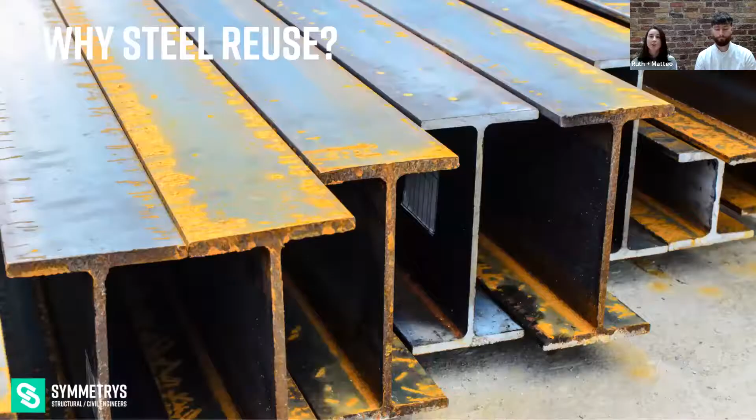So what is our particular story of steel reuse, and why are we looking at steel reuse? So it's something that's been talked about broadly for many, many years, even decades, but it's all largely been in theory, and the practical application of it has actually been very limited. Generally, it's been only around demountable structures or rebuilding the same structure, but just in a new location. So we're really looking at actually reusing it for a new building.

And recently we were challenged by this on a project with a client to reuse steel. So this led us to really investigate the implications and the viability of using reclaimed steel, interrogating the practicalities of steel reuse, and producing a genuine and an actionable roadmap. So that's what we're going to talk about, but what's actually happening right now?

Yeah, so just as a quick run through, we're going to take you through how steel is created in the first place, for those of you who don't know. It is a material that's mined from the ground in the form of iron ore. That iron ore is processed along with limestone and coal and taken to a manufacturing facility. All those materials are added into a furnace, heated to a high temperature to make the liquid iron. Once that molten iron has been created, it's piped off and sent to another furnace where it is heated to really high temperatures, and that's a basic oxygen furnace. So that uses high-powered oxygen jets to heat it really, really hot, and that's where you get your steel from.

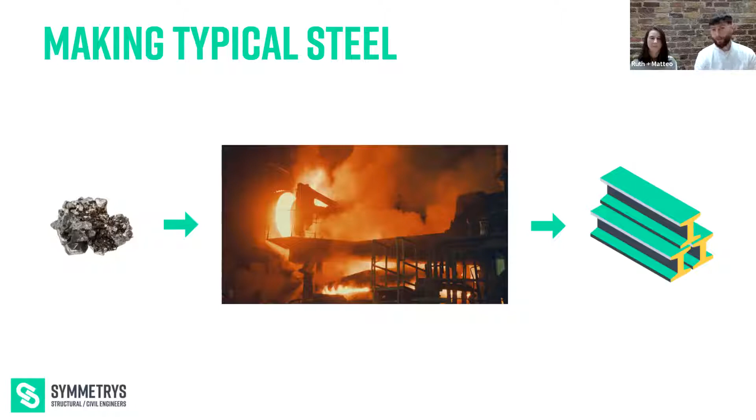Obviously, this is a highly energy-intensive process. It locks a lot of embodied CO2 into steel sections. That's from the mining of the raw materials all the way through to the actual production. And obviously mining is destructive too, or can be very destructive to local habitats. So the more that we can limit this, the better. And that's where reusing steel comes in, and recycling steel. So we recycle quite a lot of our steel. 98% of it is actually recycled, which is fantastic. And steel's amazing for that because it can be continuously recycled without any losses to its structural properties.

So the process of recycling steel is relatively straightforward. The steel structure is demolished. It's cut into small lengths and transported to a recycling facility. And there it's added to something called an electric arc furnace, which uses electricity from the national grid to melt that steel down. Now, an electric arc furnace can be charged with 100% scrap metal, which is obviously really efficient, or it can be charged with a combination of mined material and the scrap metal. As I mentioned, the electric arc furnace is run from the national grid. So the embodied carbon associated with steel that comes from an electric arc furnace is really dictated by how efficient and green your grid is.

Obviously, 98% of steel is recycled, but unfortunately, that's not enough. Our demand for steel is so high that 63% of virgin steel is still used in the UK today, despite all of this steel that we're recycling. And it's really an indication of us needing to design more efficiently so that we just use less steel, we're reducing.

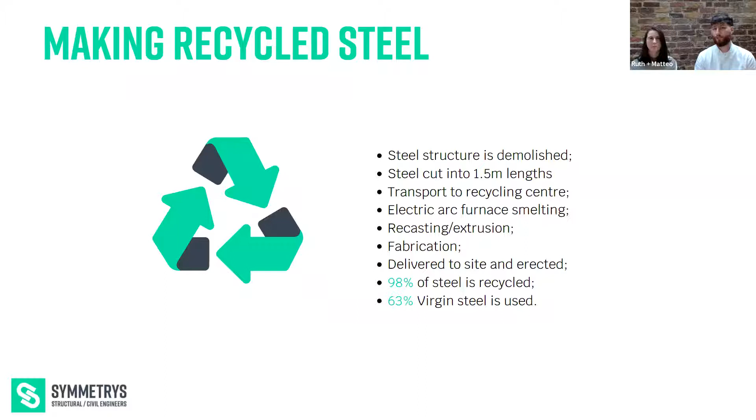But why reuse steel? Well, the sad fact is that 1% of construction materials are actually reclaimed. It's an incredibly low number, with a lot of construction materials just going to landfill. Obviously, in the case of steel, it's great because you can recycle it. But as I mentioned, electric arc furnaces actually have embodied carbon associated with them. Even though you're recycling that steel, you're still having to heat it up, smelt it back down, and recast it.

If an electric arc furnace is in somewhere like Poland, which uses a lot of coal, their coal-fired power stations are going to be powering that electric arc furnace, and it's going to have a higher embodied carbon than, say, somewhere like Denmark that has quite a green grid. So really, we want to be looking at reusing steel sections that have already been created that have a reduced embodied carbon, which we'll come on to later.

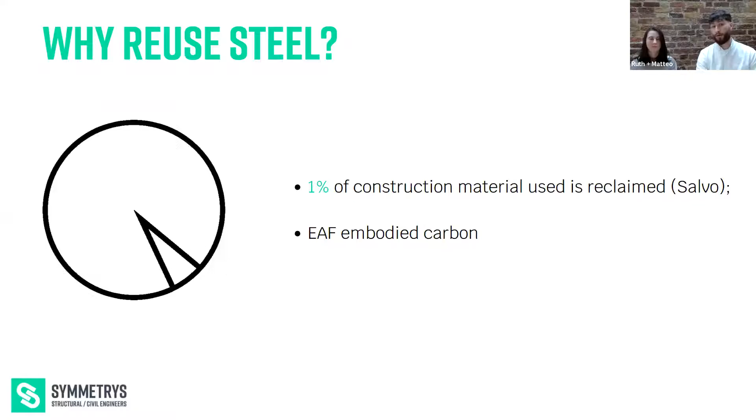So how are we going to reuse steel today? And that's why we're doing this. So obviously the trio of the 3 R's is reduce, reuse, recycle. So we need to start reusing. And we also need to start being more efficient in our design. And this also really chimes in with the ICE President's Address, which is all about material efficiency and design efficiency. So how can we increase that and also steel reuse?

So what is our actionable roadmap? So first off, we envisage this process is currently likely to be driven by clients and developers, and they will be a key stakeholder in this. So the first stage of the process really is, as a team, to identify a suitable steel building. Ideally, we would refurbish as much as possible, but sometimes demolition is necessary. So of buildings that have been earmarked to be demolished, which buildings are suitable to reclaim steel from?

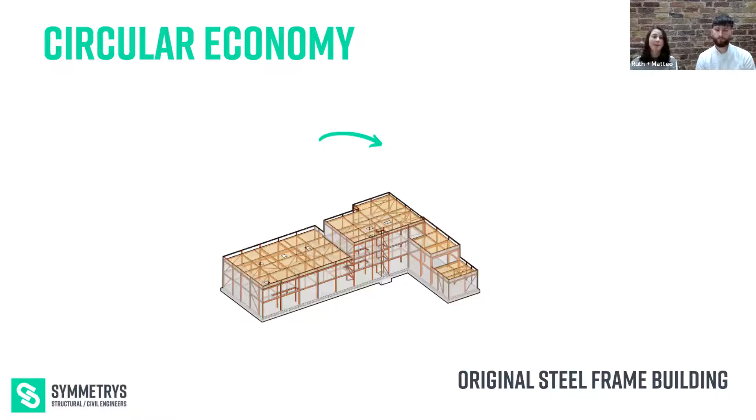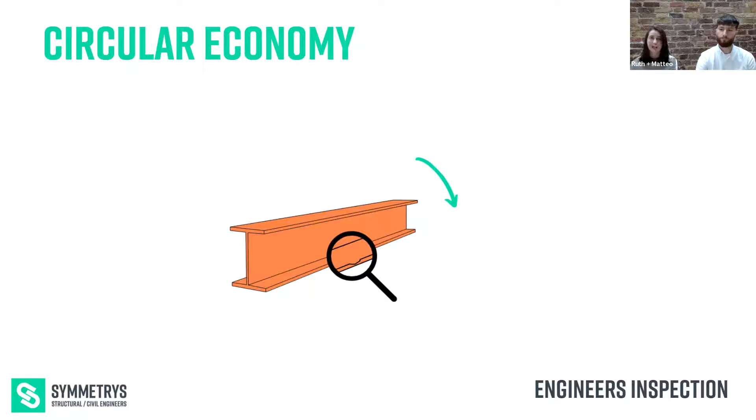So once we've identified those buildings, we can go and inspect the steel, assess the quality, the suitability for reclaim and reuse, and any potential issues around deconstruction. We can approximate the amount of steel that we think we are going to be able to reclaim from the building and start looking at any post-deconstruction processes that may be required, perhaps to do with finishes, intumescent, and start really de-risking the purchase of this steel.

So then once we've done those inspections, we can start planning for the deconstruction. This will require engagement between the demolition contractor and the design team to plan that deconstruction process. How do we take down the steel to maximize the amount usable? How do we manage any of these issues we've identified in the inspection stages? For instance, it's very common at the moment to flame cut beams. As we'll talk about a little bit later, you lose steel length there, rather than blowing the bolts.

So these are all the kind of things that we can discuss in this planning stage to try and make sure that we maximize the amount of steel that we can reclaim and reuse. For things like columns, for instance, at the moment it's standard practice to bring them down level by level, but can we look at ways to drop them between their splices so you get much longer lengths for reuse? And we can really start at this stage of the process to look ahead to the further design program.

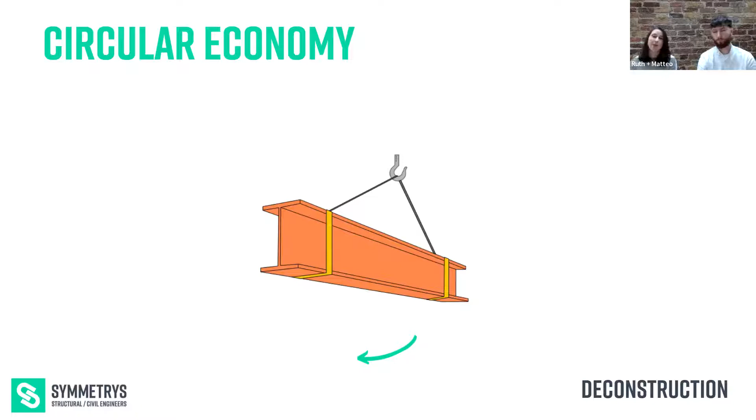So once you've planned that deconstruction, it can be carried out. Ideally, at this stage, we would start grouping the steel, as will become apparent later, based on the section size, the location in the building, details such as finishes, the use of the steel, and any other indications we might have based on potential fabrication information. After deconstruction, the stockholder will then collect.

So then we can go and test the steel. And this is where the grouping is really, really important, because we can test the steel based on those groups, which at a maximum, the recommendation is about 20 tons. And testing will be a mixture of destructive and non-destructive testing. At a minimum, you need to assess what the steel grade is, and depending on the requirements for reuse, you might require further tests for things like subgrades and toughness. Alternatively, we can make safe assumptions based on steel grades, existing use, and depending on what that planned reuse is.

There are lots of test centres already available in the country who actually provide this service. Typically, it's done more for things like offshore and very large industrial rather than construction, but steel is steel. So actually, this is one of the more straightforward parts of the process, and we have lots of industry currently capable of doing this.

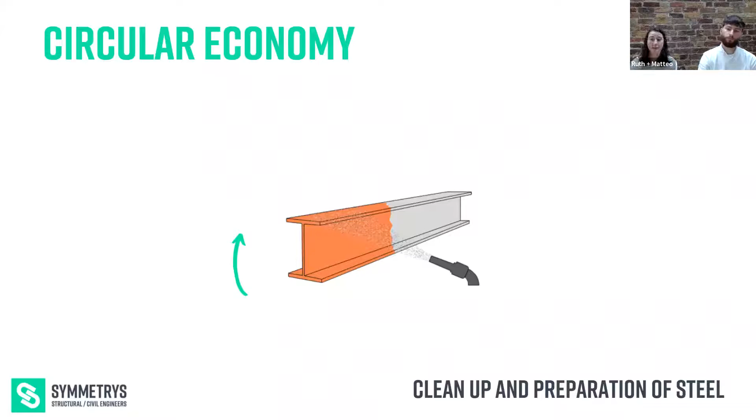Now we come on to preparing the steel for reuse. And this is one of the aspects that can be potentially more challenging and involves more engagement with some of the stakeholders and the fabricator. So here we'd be looking at potentially removing any undesired finishes, any paints, any intumescent, maybe there are shear studs, additional stiffeners, etc., that we don't need.

And one of the problems here with fabricators is things like potentially contaminating their machinery from shot blasting processes. And this is one of those issues that we can pick up early on at the inspection stage, and we can plan for prior, so we can know what we're doing and can go ahead and take it forward and be assured that we are going to be able to actually reuse and reclaim the steel.

So then once we've prepared the steel, we can fabricate it for the new use. So we can add finishes if that's necessary, add new connections if we require new penetrations. And once it's been fabricated, we can deliver it to the site.

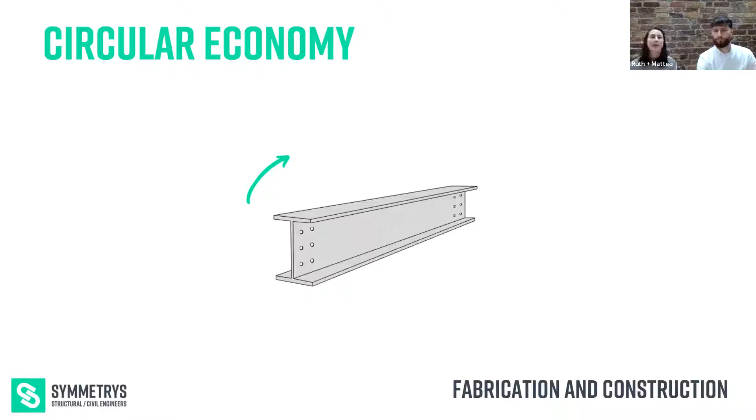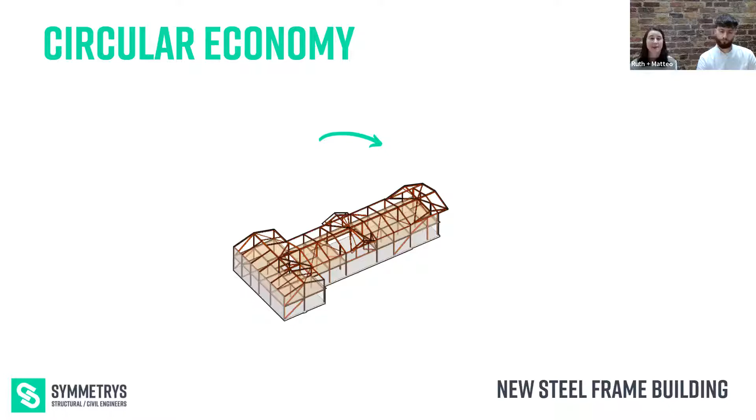We then come to construction, just as we know now, with the installation of our reclaimed steel. But rather than, as has been happening generally now, where it's take down a building, move it, build exactly the same building, actually what we've got now is a brand new building with a new and distinct design from the original building or buildings that we reclaimed the original steel from.

So to summarise, at the moment, we see there being 7 key steps to the circular economy and to this process. So we start with the original buildings, we go through inspection, planning, deconstruction, testing, preparation, fabrication, and new construction. As you can see, this process is currently relatively front-loaded, with a lot of the activities occurring relatively early in the design program and relative to procurement program and tender.

So clearly getting early stakeholder engagement is going to be really, really key in being able to successfully reclaim and reuse steel. So, as we've outlined an actionable roadmap, why is this not happening already? Yeah, so during our research, we've come across a few challenges, and I think it's key to note now that we don't perceive them to be insurmountable. We really think, if the industry is set up to tackle this, we can move past them. So let's go through a couple of those now.

Initially, you're going to need a client who's willing to do this. They have to have an appetite for it, and they have to be willing to accept things like finish. You're not necessarily going to get the same finish on a reclaimed piece of steel as you are from one off the shelf. Things like shear studs, as Ruth mentioned, can be removed from steels, but not necessarily ground flat. So painting over them, it might look a bit different, and that's something that the client will need to be able to accept.

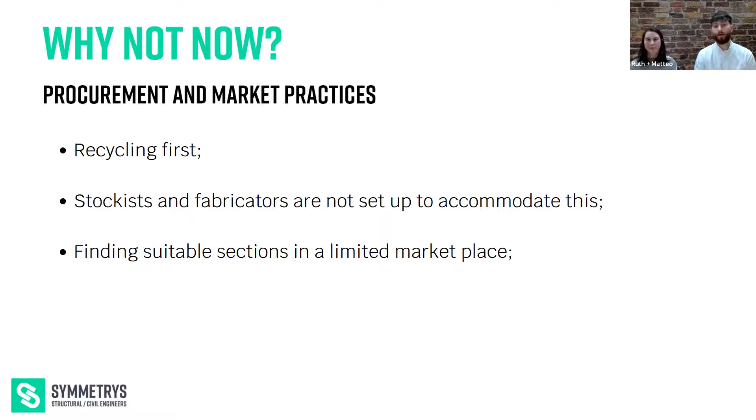We can't just use bigger sections for the sake of it, saying that maybe this office is one day going to be a dance floor. We need to have that flexibility, but using new steel at the moment, there's a high embodied carbon associated with that. If you're using bigger sections that are reclaimed, because those are the only sections you can get, that embodied carbon is going to be cut down quite a lot, which we'll talk about more specifically later. But there are benefits and downsides to this.

So going on to the quality of material, not all steel can be reclaimed and reused, but a huge amount of it can. And as we discussed, an awful lot of the assessment as to whether that's the case can be done very, very early on in the process. So issues that can be a problem are things such as paint and finishes, as we've touched on. Connections can be a problem. Corrosion of the material can obviously be a problem. A significant one to note is also age. We can only reclaim steel post-1970, and this is because at this point, the UK started working towards the Eurocode programme, and steel quality was standardised at this point, which is obviously pretty important to quality assurance.

And then another big one, kind of headline at the top, I've left till last, is plastic deformation. Ductility of steel is really, really crucial in ensuring the safety of the structures that we design. So it's really key that we do not reclaim and reuse sections that have experienced plastic deformation. This might be due to how the structure has been designed, perhaps a particular format of connections, style of the structure, but that will mean that some steel is not suitable for reclaim and reuse.

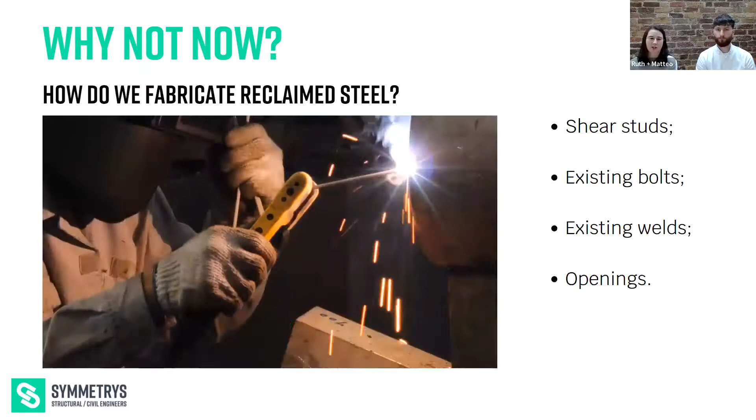So once we've identified the suitable steel and we know that we can reclaim it, we can reuse it, how do we prepare it and what is that fabrication process? What can we do? So as we've discussed, it needs to go through an initial preparation process, which is one of the more challenging aspects, but something that we can absolutely work through. But then once we've prepared the steel, you can essentially do during fabrication all the sorts of things and processes that you're used to doing with new or with recycled steel. So we can add shear studs, we can weld on new parts, we can weld on stiffeners, we can create new openings. We can use the full variety of different connection types.

So how do we specify using reclaimed steel and reusing steel on a project? And who's going to take responsibility for this? As we say, from a financial point of view, we assume at the moment that the steel is likely to be bought by the developer or by the client, and there is a certain risk to this for them. So how, as a design team, can we mitigate this risk and can we reduce it?

So during those initial planning and inspection stages, and by engaging with the full design team and with the full procurement and the fuller industry early on, we can iron out a lot of those issues early, prior to deconstruction, prior to purchase. So we really know that what we will be purchasing and what we are going to reclaim and reuse is good quality material that we can reuse for the purposes intended.

Once we've ensured that, how do we go about actually reusing it? Are contractors obliged to use it? What can we do? So this is something, again, where I think early engagement is really, really important with the contractor who's actually going to go on and build the new structure and use the reclaimed steel. So if you can engage them early in, for instance, those testing processes, get them involved in the quality assurance, make sure that they're comfortable reusing that steel and that they have an awareness, so that we can take it forward.

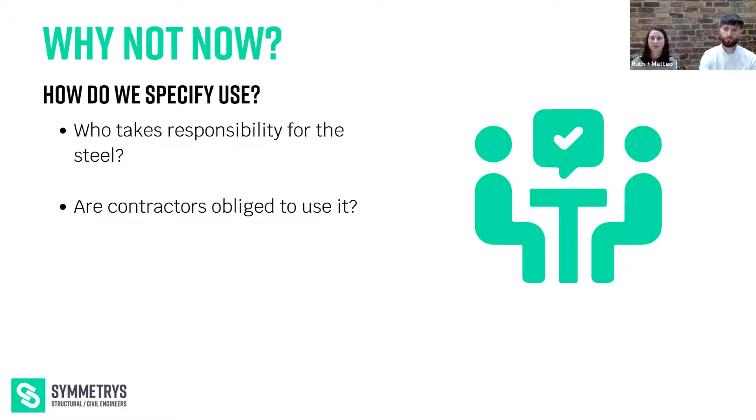So as we've discussed, there are issues, but they're all things that we can deal with right here and right now, and it's absolutely achievable even in the current market. But as steel reclaim and steel reuse becomes more established, how do we think this economy is going to develop further? Yeah, so following our research, Ruth and I have been having a think about the perfect world where this circular economy is really refined into a way of working which we think is the most efficient. So we'll take you through that now.

So what we think will happen in the future, or what we'd like to see happen at least, is that you start with your steel building, as you did before, and then instead of an engineer traveling to site and inspecting that steel, the stockist who would be looking to buy the steel speculatively would be traveling to site, inspecting that steel for all the things that we talked about before. That's corrosion, openings, connections, any deformation that's been locked in.

And then they'd be having the conversation with the demolition contractor, who again would have already been engaged to be made aware that there's an intention for this building to be deconstructed as opposed to demolished. So that demolition contractor would then be deconstructing that building in a way that's not going to affect the integrity of the steel. The stockholder would then buy that steel, and it would be transported by the stockholder to the stockyard where it's being stored. That stockholder would then send that steel off for testing. Once that's been done and the certificates have been issued and the insurers are happy, that steel's ready to be bought.

Then from our point of view as designers, we'd be designing a building, having had that conversation with the stockist of, what sections do you have in stock? We've got this building, what can we use? And then our designs would go off to a fabricator. The fabricator would get in touch with the stockist, buy the correct section sizes that would all be reclaimed. The fabricator would fabricate it, deliver to site, and the building's constructed. And so that's how we see it working in an ideal world.

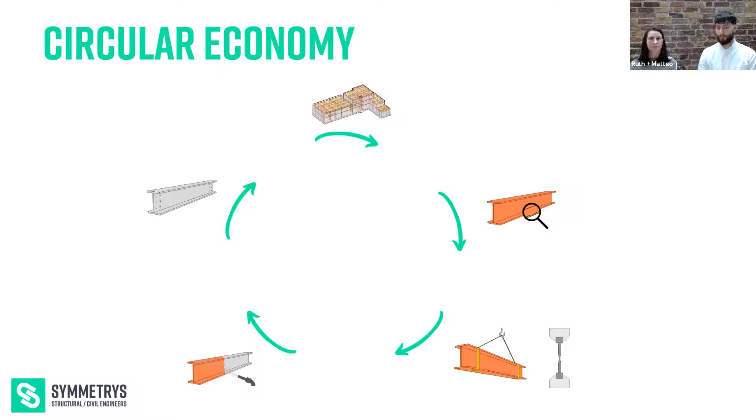But what is really the key point of all of this is the embodied carbon, which we'll talk about now. So how do we actually count carbon for reclaimed steel? Well, it's not as straightforward as you might initially think. Life cycle assessments, which are the calculations that we use to assess embodied carbon in a material, are really set up to be linear calculations. Now, there are sections of that calculation that allow for recycling that material at the end of its life. But we're really looking at a circular economy and reusing that steel multiple times.

We've had a go anyway, and we have come up with a figure that's been backed up by data from Aalborg University in Denmark, who've done a load of research on construction materials, their embodied carbon, but more specifically on reclaimed steel. We've cross-checked the values, and we've come up with this value of 80%. Now, that's an 80% reduction in embodied carbon versus a standard section of steel. That's a huge reduction in embodied carbon.

And it really has fantastic potential to start to turn around the perception of steel. Steel is typically viewed, I think, as a carbon-intensive material, and we really want to start to change that. Steel is a fantastic structural material, and we want to keep using it, but we really do have to look at ways to make it more efficient, using less of it, being more efficient with our design, reusing as much of it as we can, and recycling the rest. And this is hopefully a big step on the route to that.

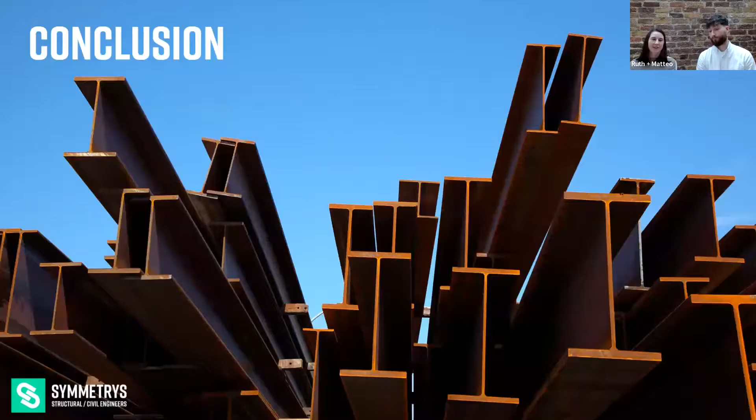But I think the key thing for us is really doing more things like this, actually having this webinar and trying to get that information out there, try to get people talking about it, and really look for feedback. If anybody else is doing something like this, we'd love to hear about it, and sort of put our heads together.

So yeah, in conclusion, we can do this today, I think, is the key conclusion from this. There are challenges, yes, but we can overcome them. It is an achievable process. We need the right collaboration, we need the right people involved, and we need to start having those conversations with people and getting that collaboration going. But reusing steel, reclaimed steel, and having reclaimed steel structures is a very realistic proposition.

Yeah, it is. And I think we're very excited about the potential for this. It really has the opportunity to offer clients savings in cost, we think, in the future, but also a huge saving in embodied carbon, which really doesn't appear to have too many downsides at the moment.

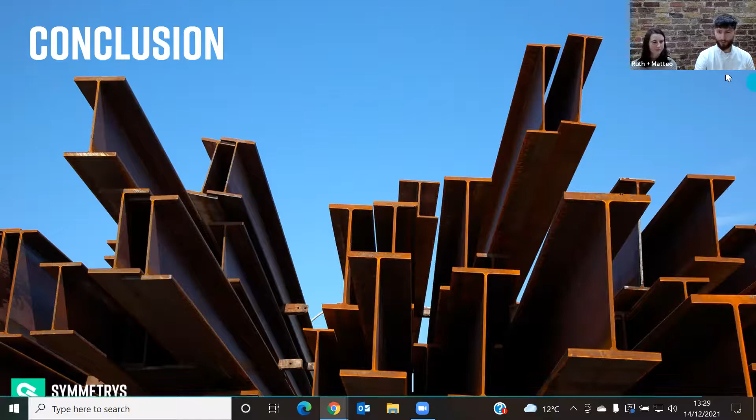So we've got a question here. Are there currently any precedent projects that have done this? Looking at the SCI, not too many. We know that there are a fair few in Europe. But the projects that the SCI seem to be quoting for reclaimed steel and steel reuse are really structures that have been constructed, deconstructed, and then reconstructed somewhere else in exactly the same form. As demountable structures, they're obviously fantastic.

They're really environmentally friendly. But we're looking at a bit of a wider scale, really, in that we want to be deconstructing buildings that can be reconstructed in a different form. So there's added complexity there. But yes, there are some projects that are doing this.

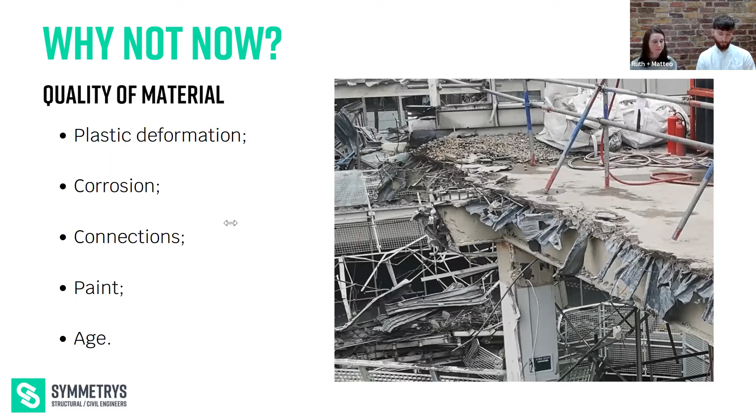I think we'll have a last question here. In terms of scalability, how much structural steel is demolished or dismounted annually compared to its demand? That's a good question. I would say that we still can't keep up with demand effectively at this point. Yeah. Like we said early on in the presentation, given the amount of virgin steel we're still using. Yeah, 98% of steel is recycled, and that's still not enough to keep up with demand, which really just highlights the fact that we're not designing efficiently enough. Obviously demand is higher now than it was in the 50s, but we really need to be keeping up with that demand, designing in a better way. It's really about: we reduce first, we reuse next, and then we recycle last.

Yeah. Richard says eBay is full of steel sections, just a matter of finding them near a site. Wouldn't advise buying off eBay. Officially, we're not advising that. These steels will have to go through a testing process and be certified by a testing center for insurers to feel comfortable, and us as well as designers.

Would a timber joist floor, CLT floor, or concrete covered metal deck be easier to deconstruct in the future? I have to say, when we visited site and when speaking to demolition contractors broadly, we were quite surprised how easy it was for them to demolish concrete decks. That came as quite a surprise to us, because this is composite as well. It's got shear studs, everything's cast together, and they seem to find it relatively easy to strip that concrete back.